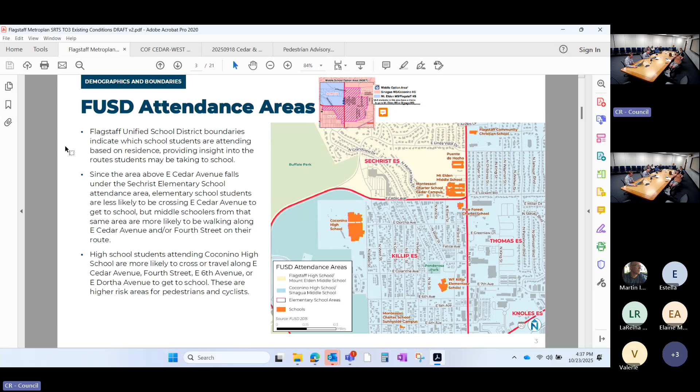This has been working on the Safe Routes to School infrastructure study. It's a little different - there are two realms to clarify: there's the programmatic side of it, and then there's the infrastructure side of it. The infrastructure side has a separate funding source - we got a grant for that, and we'll look at implementing specific stuff. Right now we're in a bit of a push for public outreach in the Northeast Schools area. That is this area in general - I'll show you, so a lot of the schools clustered together within here. So Coconino High School, MEMS, all this whole area, generally looking at ways to increase the access there for multimodal, active transportation, transit even too. All that stuff for Safe Routes to School - there's a hint at all that area together.

Here's all the different schools. We'll go through this pretty fast, just as a high level background for you. Can you go back to the one that had the number of students? Yeah, I'm just curious.

Line up to expectations. That was a lot.

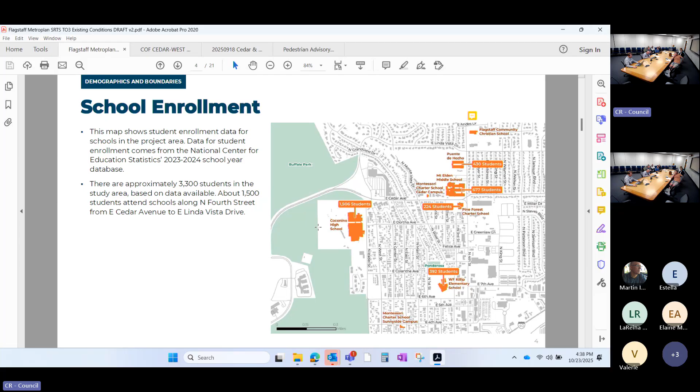Thank you. Will we be able to look at those maps a little bigger at all? Yeah, we can. Some of them I'll definitely zoom in on because they get really busy. There's a number here. This is kind of just the real high level overview stuff.

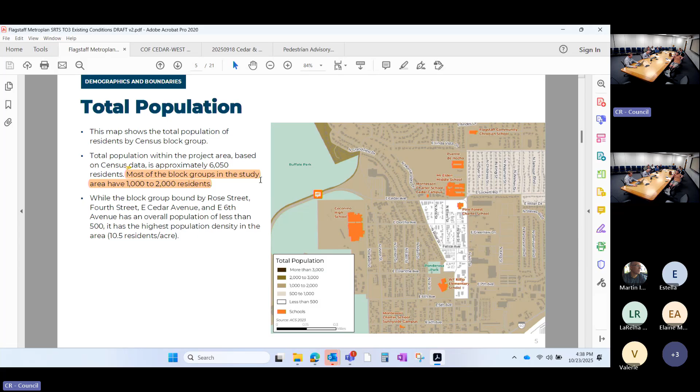Population, general population. I don't know if it tells us much. It's by block and all the blocks are different sizes.

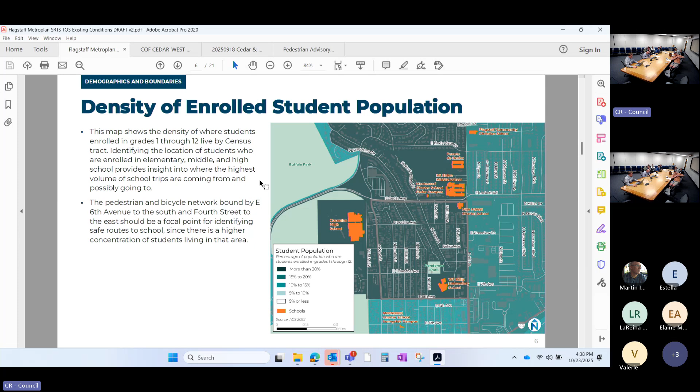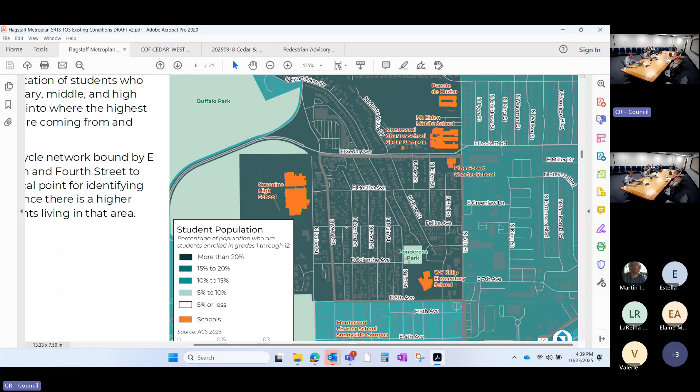Not a whole lot. This one has to do with the student population as a percentage of the total population, so you can see that it's more than 20%. I can zoom in right within here. So pretty high percentage of kids that live in this area within this walk area we're trying to improve.

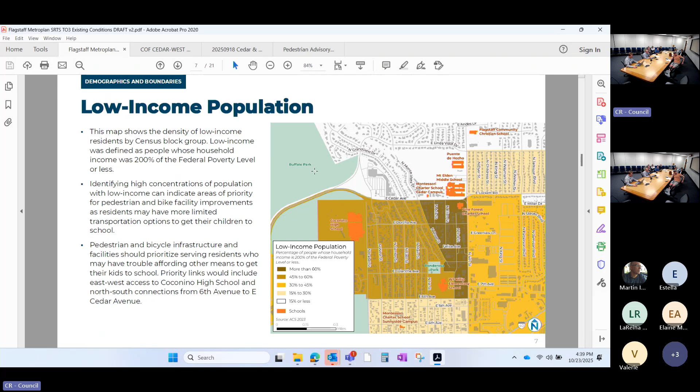Low income, which links up to zero vehicle households pretty well. So you can see the demand that's consistent within these, and for active stuff.

Here's our roadway classifications. We're generally bordered by Cedar, which we call a minor arterial, 4th, another minor arterial, 6th, major collector, and all the way over to Isabel, but more or less West Street, also the other major collector. Within there, Dortha is called a minor collector.

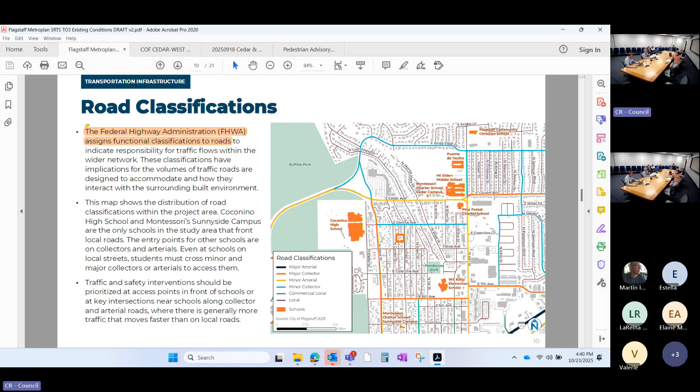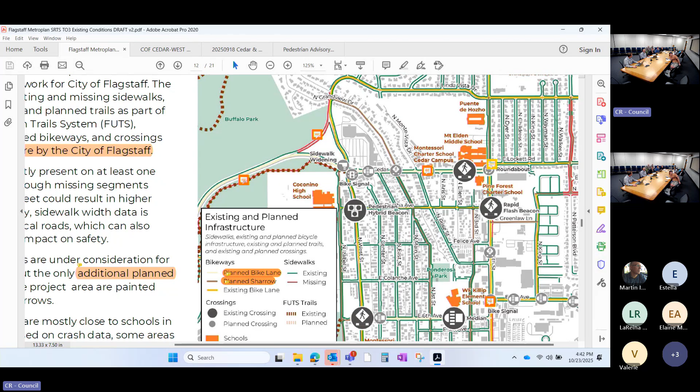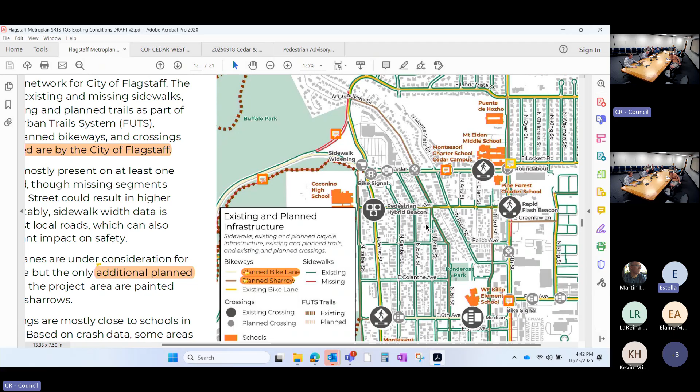Carl, before you move on, Estella, you've got your hand up? Thank you - I think it was the previous slide, curious if it was based off of the previous infrastructure and not the roundabout, and I don't know if it's changed at all, like the lane configuration with the roundabout. Not yet, except for within the roundabout. Okay.

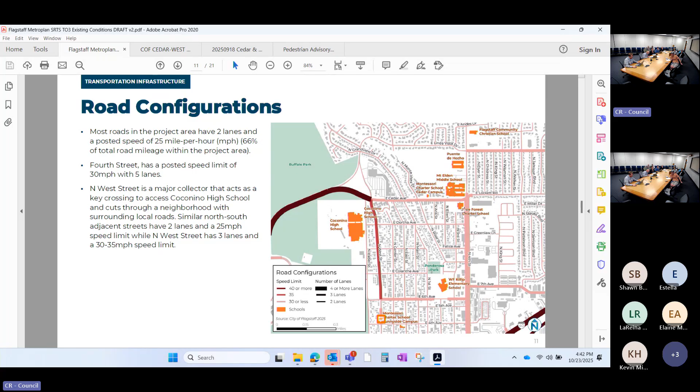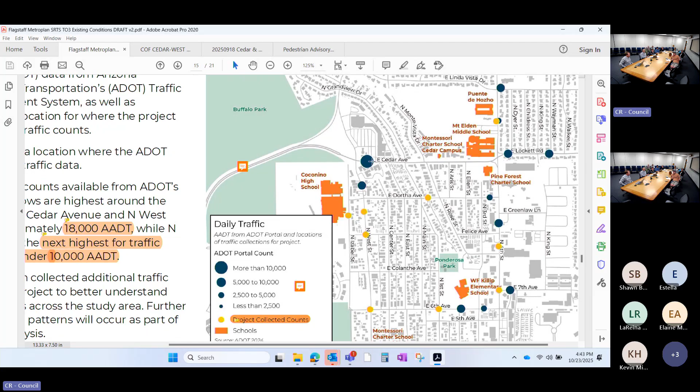Here's some existing counts. Cedar is the only one within here that is showing more than 10,000. Is that per day? Yeah. And the ridership was per day too, the Mountain Line? I don't know.

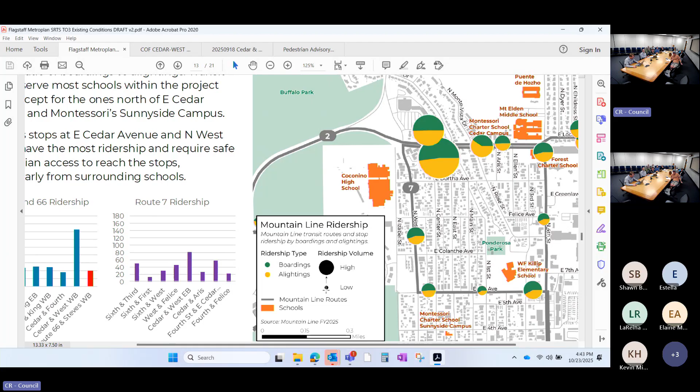Oh, relative - over to just those, low anyway. Those charts to the left though, are those like 160 versus... years, what is it? Yeah, that seems like it's a year's worth of data, no? Is that 160? That seems more like per day. Is that, or is that like an average of 1,000? Yeah, I'm not sure.

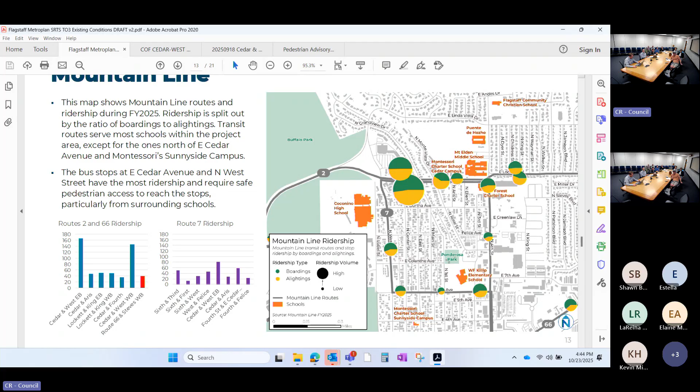I don't think so. Mystery - I think it's per day. Yeah, I would say that's per day. 40 people per day for 6th and 3rd, that kind of makes sense, but does that route run 3 times an hour or twice an hour? I think 3, there's a bunch of roads. Every 20 minutes? I think it's every 20 minutes as of July - I think it increased service.

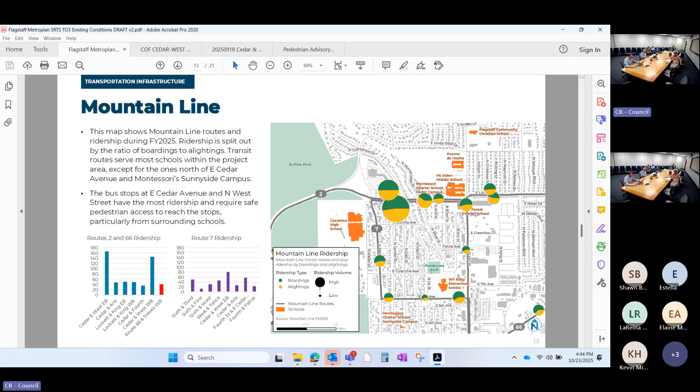This is just vehicle traffic, I'm assuming, correct? Yep, yeah, so this is your daily vehicle traffic. For reference, Milton is close to 40,000 vehicles per day. This 10,000 on Cedar, I think it's closer to 14 if you really dig in - if you've driven that, that's the perspective. Fourth, north of Seventh, is I think just under 10,000, so then it has more lanes, so it really opens up.

In terms of that - this is just off the map, but do they have counts for Fourth south of Sixth?

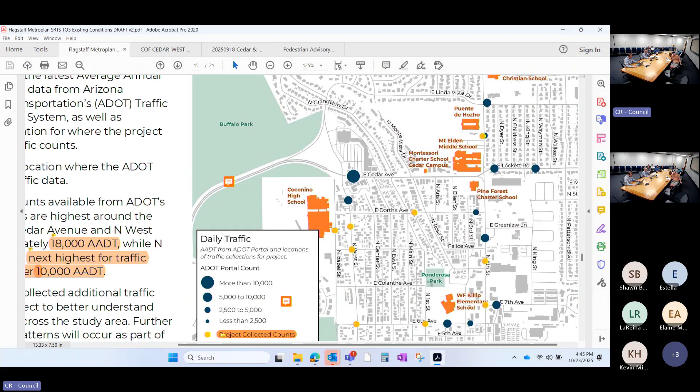I think it's off the map. I feel like I've seen it at some point and it's just under 20,000. It jumps up a good bit.

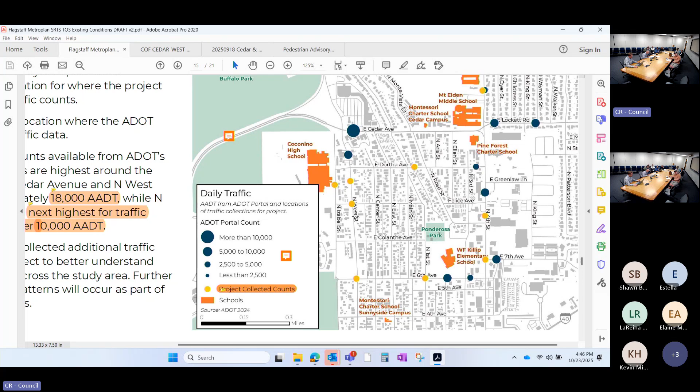So significantly different south of 6th or 7th and north of 7th. We're looking at the rule of thumb for when you need 4 lanes versus 2 lanes, so 2 in each direction versus 1 in each direction. It's somewhere around 18,000, it's kind of a rule of thumb you can go with. So I remember looking at 4th Street south of 6th, that rule of thumb shows a need for 4 lanes, but north of 7th for sure it's below that threshold.

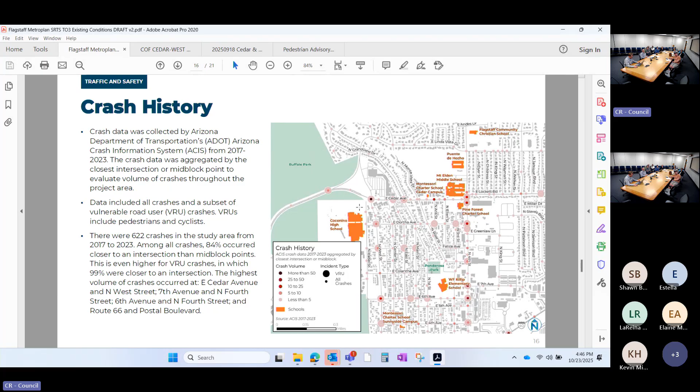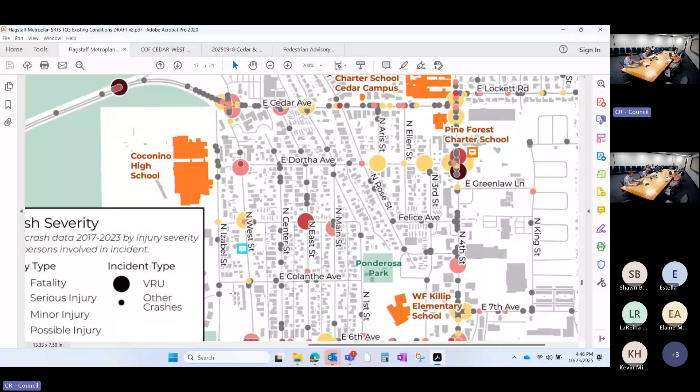A lot of other stuff can go into that, but that's the crash history. This one groups them together. It might look chaotic, but let's zoom in. The darker is more serious, and then bigger. There's only 2 options, VRU is big, and then the small ones. So pedestrians or bikes are the VRU, and then the small ones are the vehicle crashes.

That dot by Buffalo Park, is that roughly where the crosswalk is? Yeah, the beacon crossing, our RRFB beacon crossing. Okay, oh no, sorry, it doesn't have a beacon. It's just, but you know that other road, the slip lane. Yeah, it's the lane, it's a little bit beyond that crossing. But it probably is within the margin of inaccuracy of the geographic data.

So it may have been that, we'd have to pull the report to see it. When did someone die there? It's 2018. Pedestrian or cyclist? Pedestrian. It probably is then, because you get stuck from the sidewalk and have to cross over right there by the slip lane. Yeah, there are curb ramps and a crosswalk across the slip lane to continue along Cedar that way. But we weren't able to verify if that's where it occurred or not.

The other one by the beacon on 4th and Dortha, their pedestrian fatality, definitely a cluster around there. Cluster where the roundabout is now. Pattern's certainly gonna change, just a full line of busyness all the way down Cedar.

Dortha had more than I expected, thought it'd be a little quieter. West didn't seem to have much along it, it was just at the crossing spots. 6th has less than Cedar, but definitely a pattern of unsafe stuff along 6th.

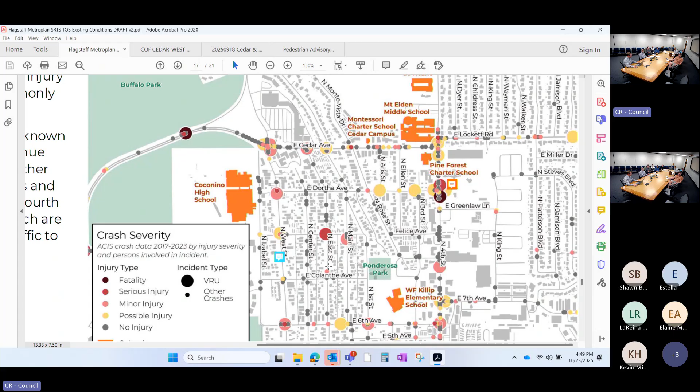This one, the generic answer is too fast or didn't get out of the way. It's just what shows up in the police reports.

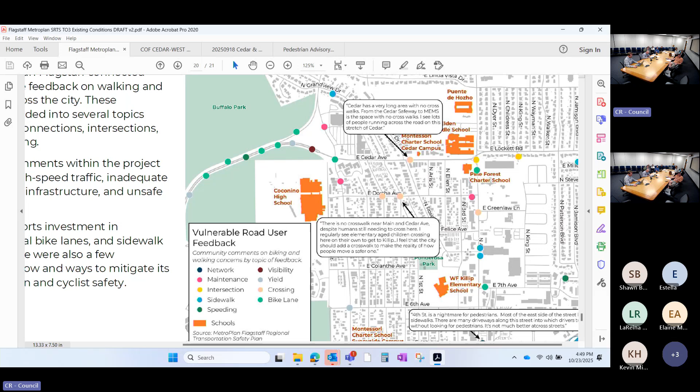Here's a few things. There was a separate MetroPlan effort going on that wrapped up just a little bit ago. In general, they could say there's a bike lane issue and you could put a dot where you had one, or a sidewalk issue. So there's a few of those on 4th Street as an example. And then these quotes, I think the arrows are from the user survey, so they're not exactly accurate, but the sentiment is accurate.

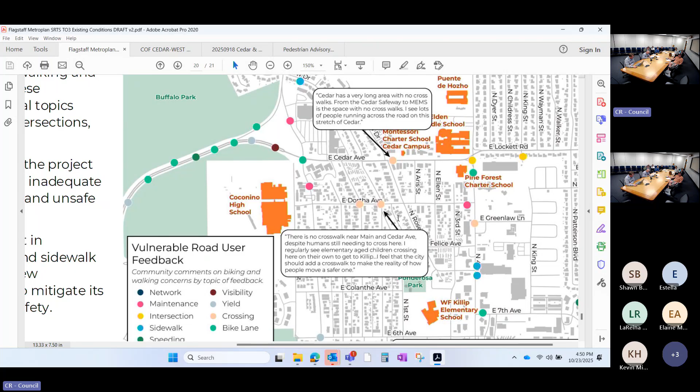Crossings on Cedar, there's 2 crossings there, and there are 2 comments talking about that. And then a general '4th Street's no good.'

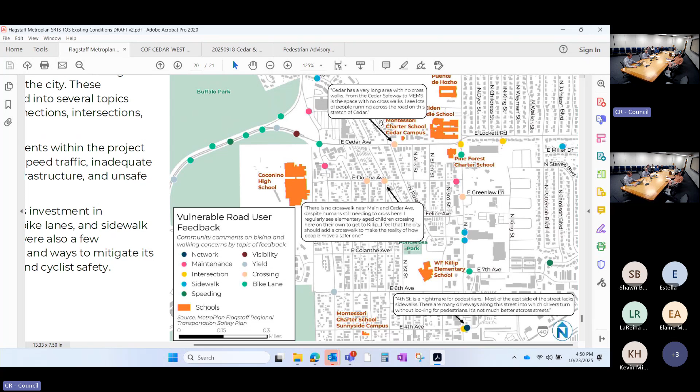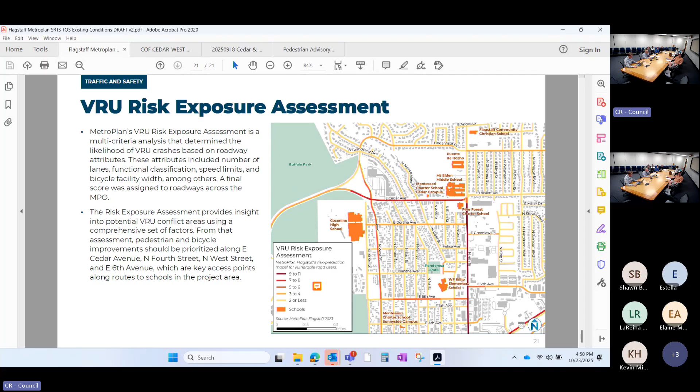Tallying them up and giving it some sort of ranking with their previous one. We'd have to dig into their rankings for it to mean much, so go back to here.

This is a bit closer to where we're at. What we're looking for here is, we've gone to the Sunnyside Neighborhood Association. We're just getting this survey out that aims a bit more to identify where people struggle and what are the issues. And then we'll dig into solutions a bit later.

So with this survey, as you jump in, if you have a slam dunk solution, sure, throw it in there, but generally this group understands the infrastructure design a bit more. Sometimes it's just more efficient and targeted if you ask where do you struggle, what do you like, what do you dislike, versus jumping straight into what's the answer. So that's where we're at, we're asking those questions within the survey.

We can brainstorm a little bit while we're here too, but I'd also encourage getting it in the survey so we can filter and have a record of those comments later. I think the link to the survey is on the digital agenda for everyone online too.

So that's kind of the background. A few things we're moving with right now to share.

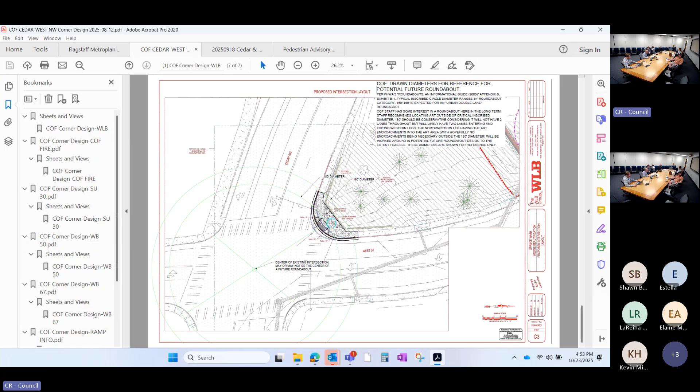This one I put in here. It's come up as an idea. These are general rule of thumb radius for roundabouts. So if this ever converted to a roundabout, we'd happily redo the ramp. That wouldn't be a big deal, but we wouldn't want to redo the art.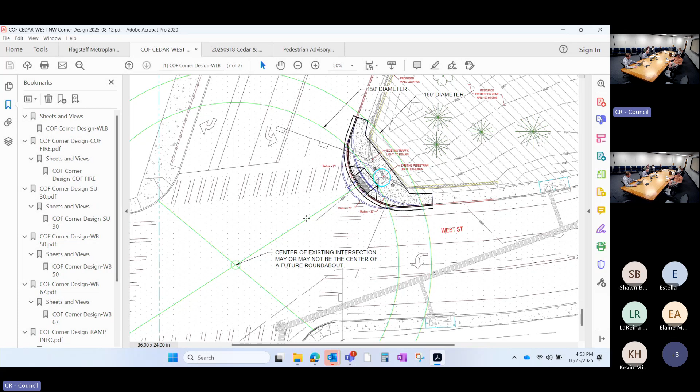So that's the reason for drawing this, and maybe this outside line would be the best place if the art could be outside of that, giving us flexibility for a roundabout at some point, to have some advantages.

Bookend Cedar with 2 roundabouts. The other thing coming soon: there's been a lot of different construction slicing across Cedar and through it, and they're just going to mill the top inch or so of pavement and put brand new fresh pavement on it.

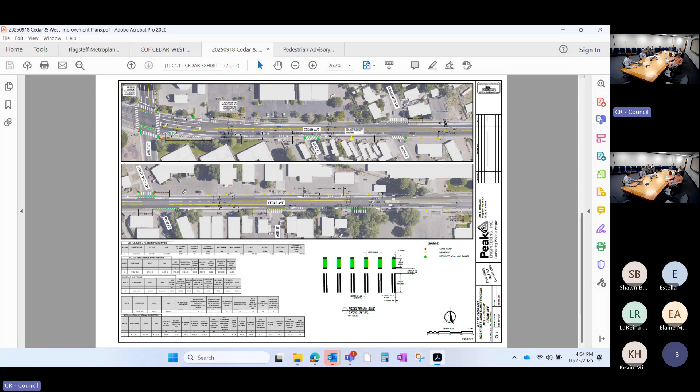So while they were doing that, we took advantage and are restriping it. We have to hold the general scheme of striping that exists, whereas with the infrastructure project we could reinvent it more, like move the curbs, play with sidewalks, more medians and crossing warrants. We'll get through all that in the overall study, but this one was kind of a quick update project.

It should repave next week, from what I hear. Then you have to wait a couple weeks to put the striping in. Since it's winter and cold, the striping might be temporary at first, and then the thick real-deal striping will go in the spring.

Extra green on the crossing. General gist of it: we narrowed all the lanes. There's a 3-foot buffer and a 5-foot bike lane everywhere. Where it merges with the bus stops, it becomes a shared area for a little bit, and the bus will be able to pull in here and be fully out of the lane, so there won't need to be any weird maneuvering to get around the bus.

What's the current lane width? They're all, I think, 12-foot lanes and a 13-foot center lane. Yeah, and this would be three 11-foot lanes, essentially. For reference, Milton and 66 already have 11-foot lanes, and 10-foot medians—so even a narrower median here.

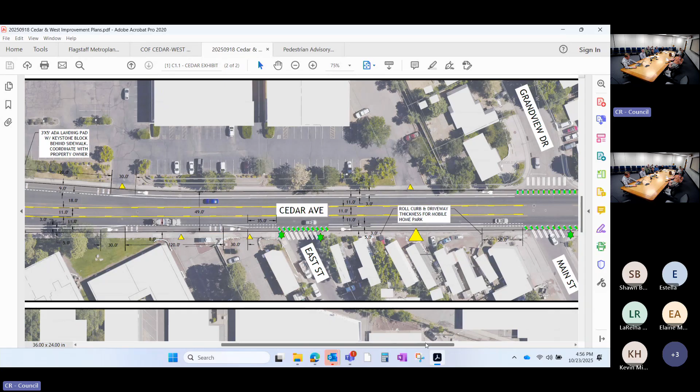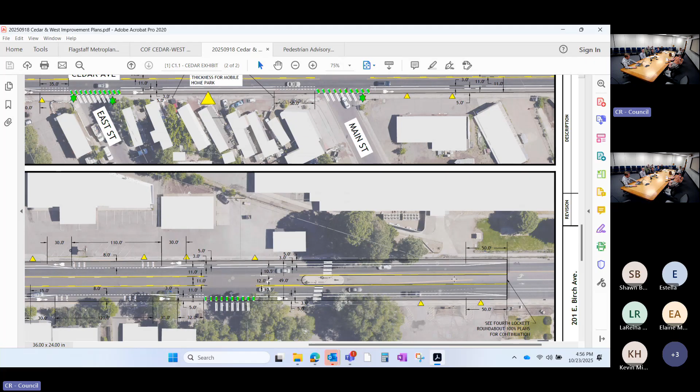We invented kind of a new thing for the bus stops, and then basically just a buffered bike lane, switching the lane width from how it used to be. See how it ties into the roundabout a bit—basically the same idea, and then it'll turn into the roundabout from here. This striping ought to come in a couple weeks.

There are a few things coming. Is there places? I know a lot of you—sorry, I can walk all over. Sorry, Estella, go ahead. Before moving on, sorry, I'm just jumping in—do you mind going back to that graphic?

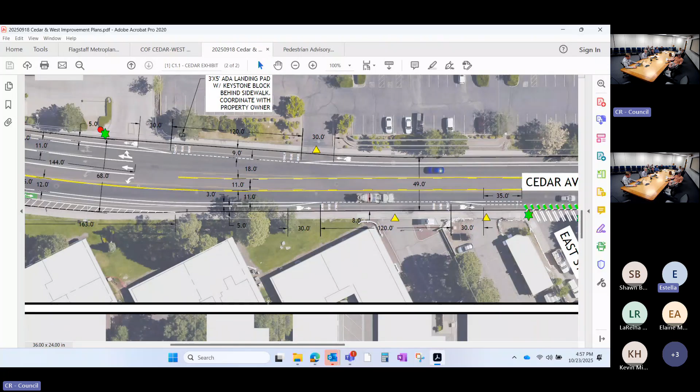First a question: have you coordinated with Mountain Line for these bus stops? I know a while back they wanted to move these bus stops because of so many people running across, and the one on the north side is one of the top stops. They wanted to add a shelter but couldn't due to the right of way. We didn't get to the shelter part because it wasn't a right-of-way-able project yet, but we moved this one from here to over here, in between here.

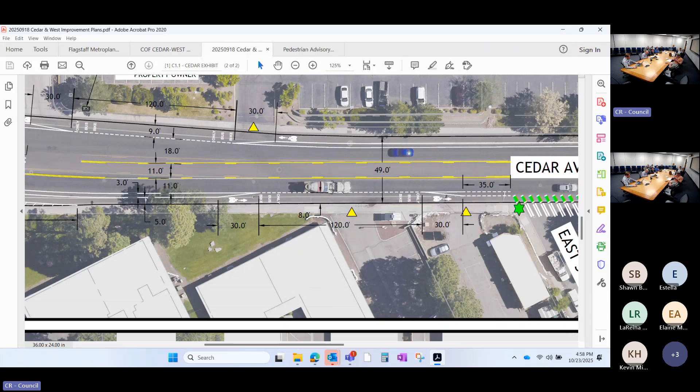Hopefully that brings them closer to the crossing, encourages a little bit more of that. Since this one has a shelter, we left it alone. Operations went out and tested this area and gave the okay for it. And Mountain Line in general, while we were brainstorming this scheme, we got some widths and ideas from them.

They were in on that from the whole way. The eastbound stop is remaining where it is now. The westbound stop is moving closer to the intersection, moved one driveway closer.

I'd be curious to get other BAC members' thoughts on this bike lane with the bus, because if a bus is there, which is pretty often since both buses are 20-minute frequency on the southbound, a bike would be pushed into the road or have to wait for the bus. Is that the thinking?

I bike this pretty frequently. I actually haven't run into buses too many times, maybe just by luck. I've had more issues biking both directions with the parking lots, especially the Safeway parking lot, being cut off by vehicles pulling in and out.

Yeah, vehicles pulling in and out, particularly where Carlton is, where you said they just moved the bus stop to, that's the number one area where I've almost been hit on my bike.

To be fair, especially during construction, I've just been taking the lane, so buses weren't an issue for me. But I could see that being a potential problem. I don't think I've had too many conflict points with buses riding this.

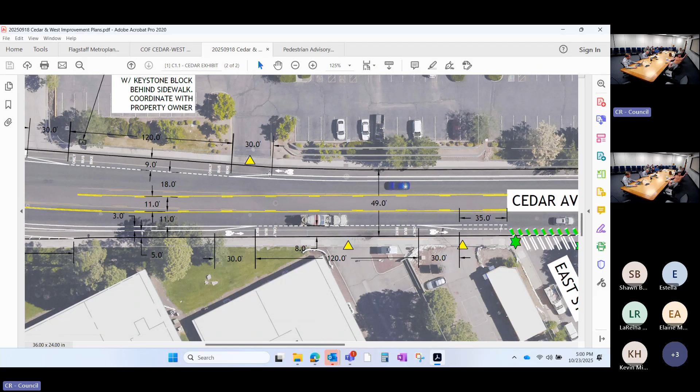The thought is on driveways, the line doesn't break, and people in Flagstaff are awful drivers. Then at the road, the lines break and this green carries through. There was the option to add some green within this taper, but it got voted down for maintenance.

Who was part of that vote? How did that come up? Any attention-grabbing feature helps, I agree, it's a safe school feature.

I think if you've got misalignment on the bus stops, people are going to run across, they're still not going to go to the crosswalk - I just don't think they will, because people are switching lines frequently there. That's part of why they're running across.

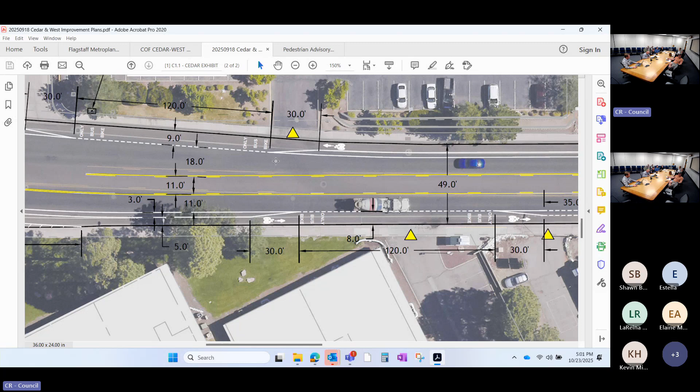They're going from something westbound to something else eastbound. At least that's what I've seen when I lived in this neighborhood - people were often crossing from a bus stop to a bus stop. So maybe it will do something, but I'm not confident that it will do much.

This was while they're doing a repave overlay effort, and then hopefully with this larger effort we could evaluate medians and crossings, even moving the curb can get a bit larger with that one.

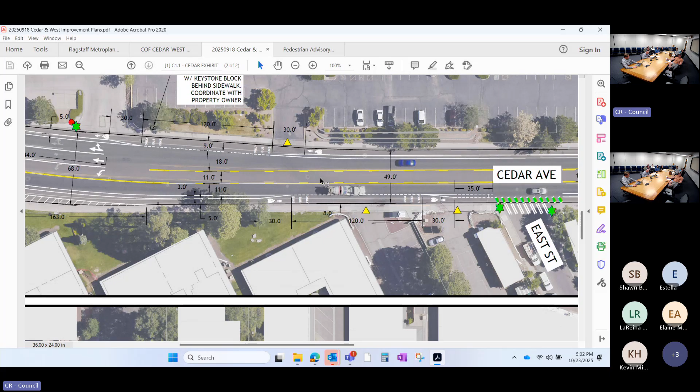How long is the distance between the Cedar West stop to the next Beacon crossing? Because there's multiple bus stops along that leg of Cedar, right? That's part of why so many people are crossing, not at a stop.

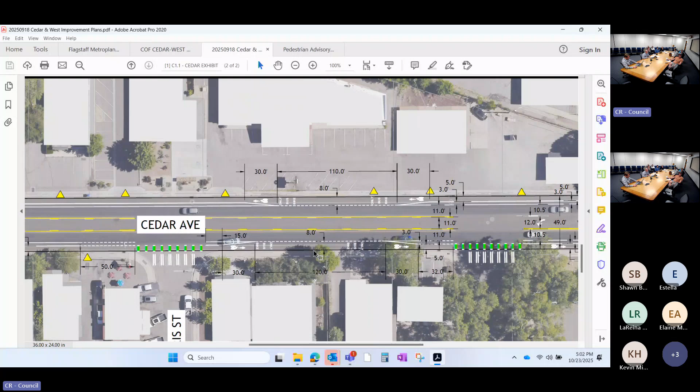Because the bus stops in front of New Jersey Pizza Company, but then it stops again, I'm not good at distance, maybe 200 feet later or something like that - the next one to the east.

Yeah, so if we're zoomed out, we got this one, and then New Jersey like you said, and this one - they're more directly across. Those are the four.

I think we've talked about this in the BAC before - that's part of why there's so many people crossing, there's bus stops quite frequently for different routes along there. And the crosswalks are pretty far apart, from the Beacon one by the school to Cedar and West is pretty far. So there's definitely an identified need for crossings along there.

I think the striping we're doing now is just restriping by opportunity, because we have that.

Because it's happening so quickly, we couldn't work in any other places to add crossings. I think when you think about this survey and the next phase, we can identify all those things. Cedar is not high traffic compared to a lot of streets, it's only 2 lanes to cross, and there's a median in the middle. It may be possible to include crossings without any extra enhancements, and it may be perfectly comfortable for people to cross at those places. So I think all those things should be in play. We can talk about it now at this meeting, but if you fill out the survey, bring that up as well.

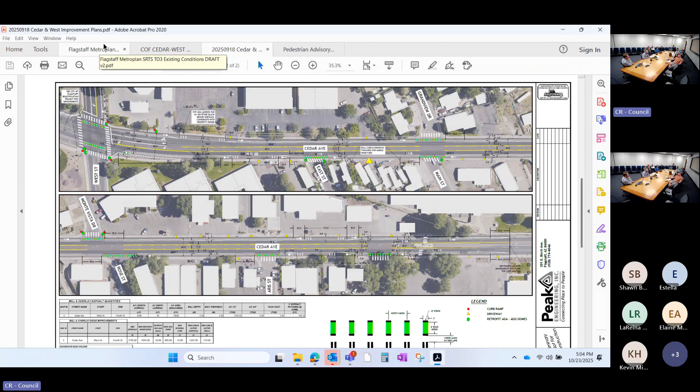I'm kind of curious if there are potential unintended consequences of putting the bus stop between the two pull-ins and pull-outs by the gas station, because that's where it is, right? There's the gas station and then the old Walgreens or whatever it was, I don't know what it is now. You don't currently have a density of people there, and those two areas are already kind of crowded with cars coming in and out, and now you're gonna put more people there with the bus stop. I was just wondering if that may actually increase the potential for interactions, especially if there's a bus there and you're looking at the bus.

And then you're not focused on the car about to hit you. So it was right here, and that came up in the context of this being the busier one, and when the buses stop, people will go around the bus, and it's even more blind.

Tough spot. I think Mountain Line wants to put a pad in some more here, so this was kind of step one in the city. We wanted it closer to the intersection and encourage that use. That was the main reason.

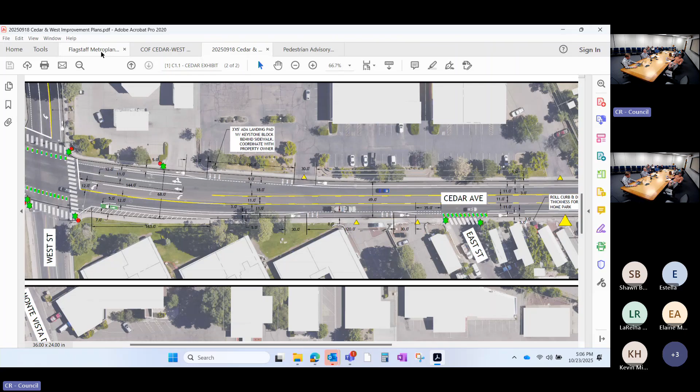Do you want comments on general safety concerns in this area at this point, which we can also complete in the survey? Because I have lots of things to say, if that's what you're looking for.

For example, on West, that bike lane, I also bike like twice a week, and it's always blocked, or frequently blocked by trash cans the whole way down. So I wind up taking the lane, which is generally okay since traffic is not huge and people are pretty good about passing. But that's one of the bike lanes that I think has the most frequent recycling cans the whole way down, because it's residential primarily, right?

And then some business, yeah, it's both. There's some businesses along there, but just on every trash or recycling day, it's full of those cans, and I'm just in the lane. I don't go up there as often, but to me it just feels like every day is trash and recycling day. Also, people don't put them back very frequently.

Otherwise it's not terrible, apart from Pine Needle and the general problems of debris removal, but the traffic is pretty low. Do you notice, it looks like there's a parkway sometimes, but not always? Are the trash cans in the parkway when there is one, and then in the bike lane when there isn't? Most frequently starting at 6th and then going towards 66. I don't think there's much of a parkway from there onward. Yeah, it's a little bit better between Cedar and 6th.

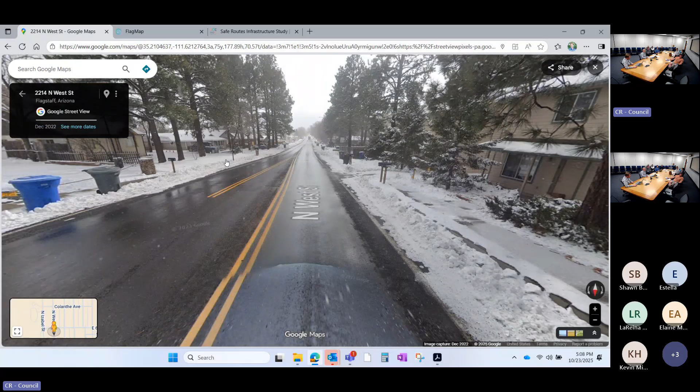In part because there's also other stuff like the skate park there. But once you get to this intersection, then they just start - there we go. Yeah, bike lane's totally blocked.

Almost there. Yep, fix it. But they're still there, and I can't tell you the exact directions - it's the right-hand side, the direction that you're going, it would be if you're on the right. I haven't had as much of an issue for whatever reason going the other direction, but yeah, there's a lot - they're always in the lane.

Fourth is also terrible for biking, in part because you're in the drains half the time. There's a lot of traffic from the shopping plaza that has Fratelli's and everything in it. There's lots of vehicles moving in and out, also by the Walgreens.

The intersection of 4th and 66, if you've been taking the 66 route and then take the little asphalt wraparound, you have to, or at least I do, depending on traffic. You can either be lucky and get to the bike lane and cross more smoothly from bike lane to bike lane, but more often I wind up using the intersection as a pedestrian and having to do a weird thing on the sidewalk, like going across a little plaza to get back into the bike lane.

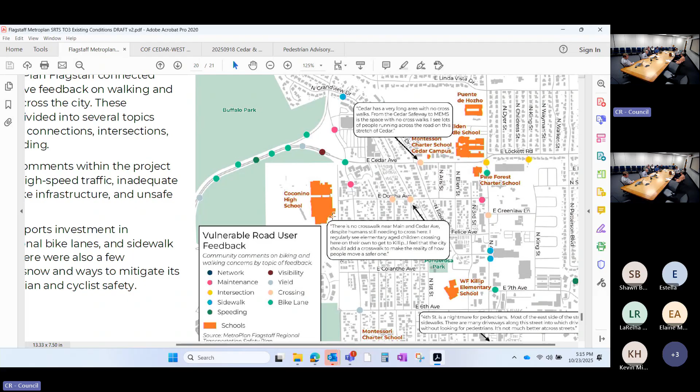Busy, vehicles. Do any of the schools - Killip I know has crossing guards at the crosswalk across 6th by Killip, they've got guards there. Do any of the other schools have crossing guards? Puente does. I don't believe MEMS does. Does Coconino? I don't know, I think so. But the elementaries do for sure.

Do you want me to answer? Yes, yes, yeah, yes. Okay, so Puente has a crossing guard at Linda Vista.

MEMS has some teachers that help - let me preface this with, there's not much training. So there are some crossing guards that help at the Beacon Crossing in front of MEMS. There are no crossing guards at Pine Forest, because there are more schools - there's five actually. Killip has one crossing guard on 6th who happens to have training because they were a retired police officer - that's the only reason it wasn't done by the school district. And there are no crossing guards at all at any of the high schools.

There you go. But there should be. Yeah, I would agree.

Just a random thing back to what I was talking about in Cottonwood - why wouldn't you have, because all the kids are focusing to get to a school, and when I was a kid, when you bike, the most fun about bike commuting is finding a new route that's somehow faster, like oh if I take a left here - it's kind of iterative, kids are doing the same thing. Within a stretch of say three blocks coming into a school from all angles, why aren't there multiple crosswalks? Back to, who cares if a car has to stop? That kid is going to cross there whether there's a crosswalk or not, so there might as well be a crosswalk. And if they're there, then they can make eye contact and cross.

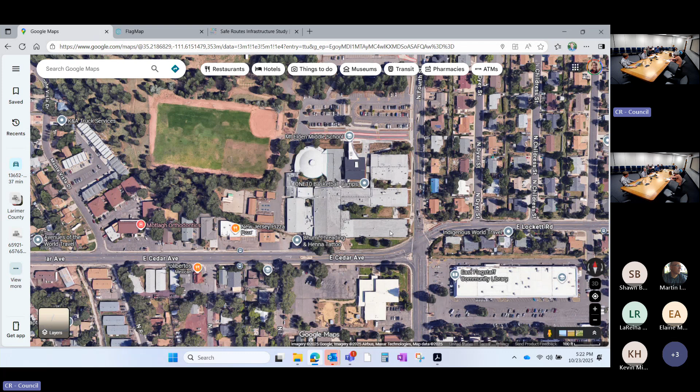Carl, anything else you have for us? That's it. Okay, great, so everybody take the survey. It'll document, Martin was busy scribbling notes on his magic pad, so minutes we'll get to approve in a few months. We'll remember.

Move us on to the next discussion item: new pedestrian advisory committee and bike advisory committee agenda format.

So you may have noticed, we switched over in the meeting notice we sent out, it was both a PDF of the agenda and staff reports and a link to the online version. Did you all get a chance to interact with it, and how did it work?

This is, if you clicked on the link, let me share here. That destinyhosted.com one. Yes, that's the one.